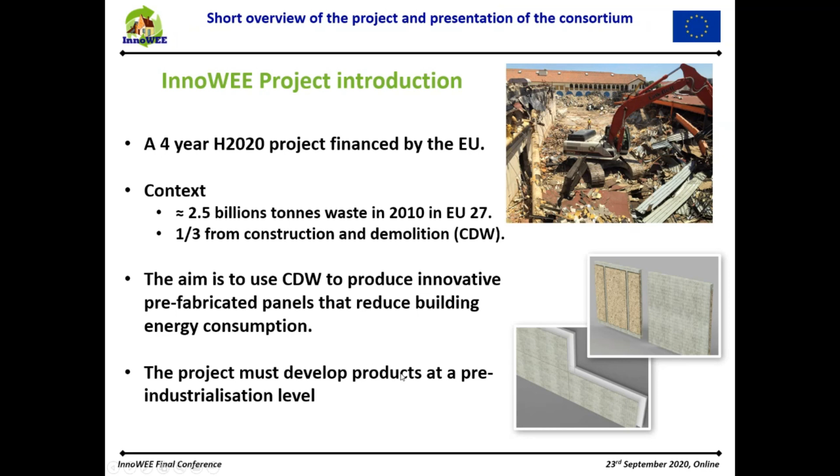We recover, disassemble, and select this waste to produce high quality raw materials to be used to produce the panels. Then we produce this panel, this construction product, to be used in the construction field. And after this production, we demonstrate the different kinds of panels in real field in different scenarios. Then we demonstrate that they are cost efficient, and we build the business model for future application in the industrialization field. Finally, as usual, we produce guidelines and training material, and we do a big dissemination, notwithstanding the problem with COVID that limited some of it, at least in presence.

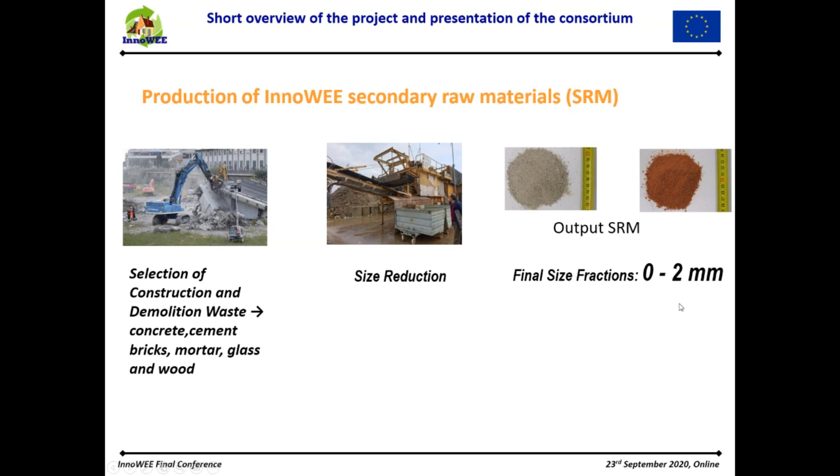The innovations that we produced were to treat the waste, the CDW, to yield suitable raw materials and use a new environmentally friendly binder, the geopolymers. Here is the novelty: we use a friendly and green product instead of concrete. You can see here very shortly, and you will see more detail after my presentation, the production of InnoWEE secondary raw material. We go from selection to size reduction to arrive at a very fine final dimension, from 0 to 2 millimeters, which will be included in the geopolymers, producing high density geopolymer panels with 50% of inorganic CDW and wood geopolymer panels with 50% of wood CDW.

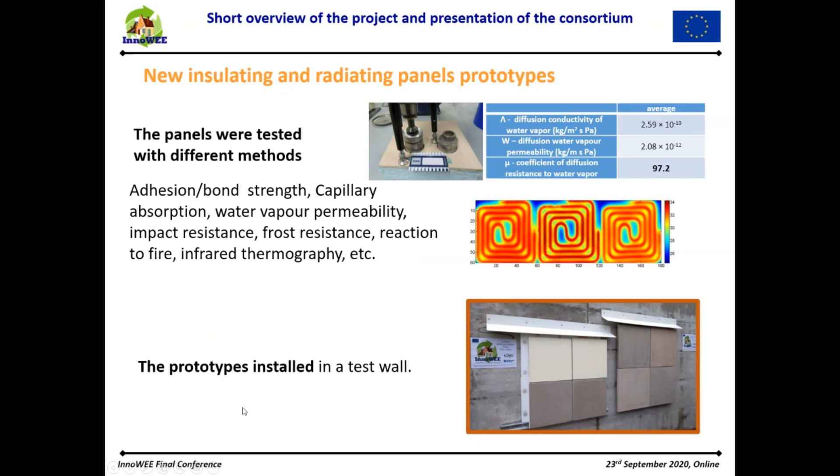This is a short figure that shows the 4 kinds of panels that we produce, which will be detailed in the next presentations explaining how we arrived at these panels. The panels we produced were tested with different methods in the lab. We installed the prototype at a test wall before going toward the field, and we scaled up the panel to produce enough quantity to be installed in the real case study, and finally, of course, distributed to the demo sites where they were installed.

What are the demo sites? We had 4 real demo sites. We had one in Padua, in Italy. There was a pilot house where we did all the tests before going to the field to install in the real houses or buildings, different kinds of buildings.

And after this first test, we go toward the real demo site. There is one in Greece, in Athens, in Voula in particular, a nice village near Athens, in a historical classified building. So we also involved historical buildings to see how we could use these panels also in more complicated situations like historical buildings.

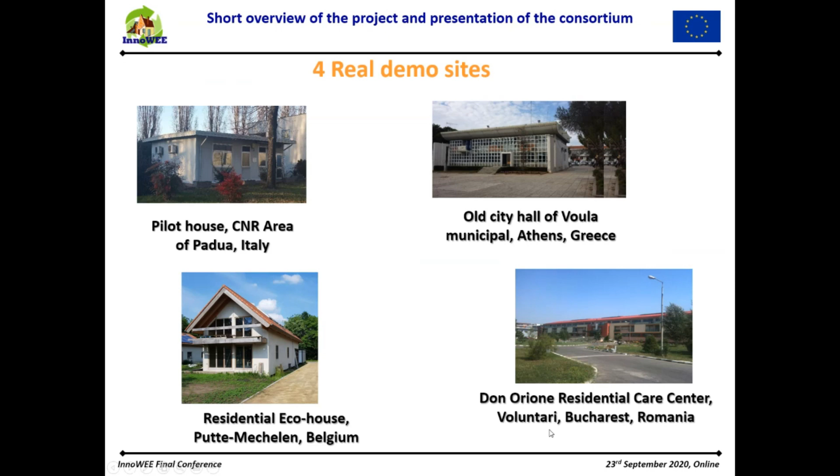We have another one in Mechelen in Belgium, and this is an eco house, a residential house built with eco materials. And after we have Don Orione Care Center in Bucharest, in Romania. In these real demo sites we installed, as you can see shortly in this image, the different kinds of panel.

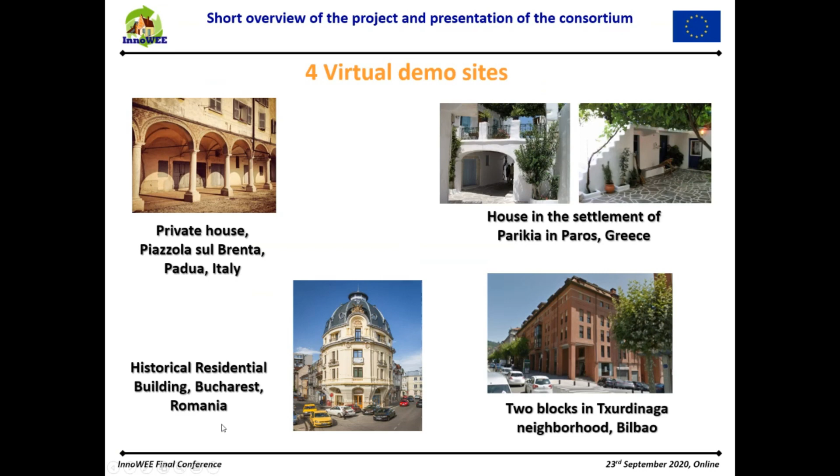And finally, we had also work that was interesting in terms of virtual demo sites. This means that they are real demo sites, but the application of the panel was not real; it was virtually put on the walls to see and model the effect of the use of the panel in this demo site. As you can see, one is in Italy, one in Greece, one in Romania, and also in Bilbao. So we did, as I said, this simulation.

This is just a little image, but there is a colleague that will present all the results and the modeling of energy performance of this product to find the best solution in terms of efficiency and comfort. As I said, these are the other aims of the project.

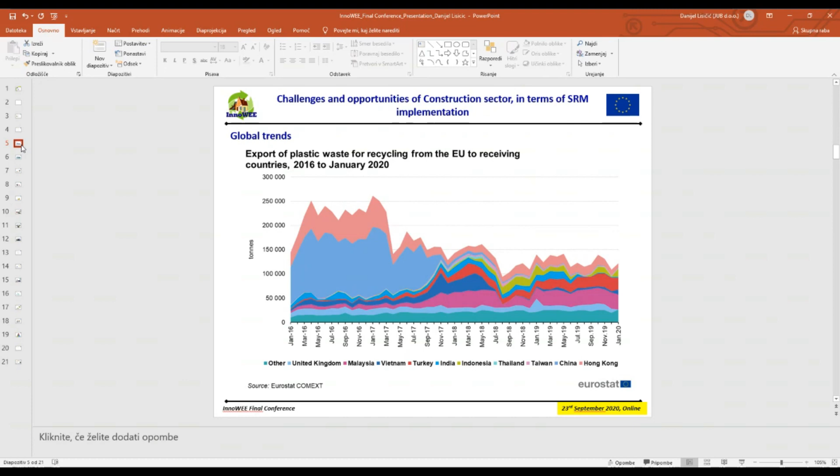The same goes for waste paper for recycling. On the other hand, the question arises why transport plastics such long distances and not find ways to effectively use this material ourselves.

So let's see some challenges for SRM implementation. One of the challenges is to have a consistent quality of SRM. The reasons for quality variations can be different, like different source through time, source mixing, or impurities.

When we developed insulated concrete forms from EPS for nearly zero energy housing, the plastic brackets between EPS walls are made from polypropylene. When we tested tensile strength of brackets from virgin raw material, the results range was much smaller compared to the recycled one. Although the average tensile strength was even a bit higher, we chose to produce brackets from virgin polypropylene. During pouring of concrete on the construction site, we cannot afford that some brackets break, because we could endanger a worker's life. So it's also the intended use that matters, and such a broad result range was not acceptable for us.

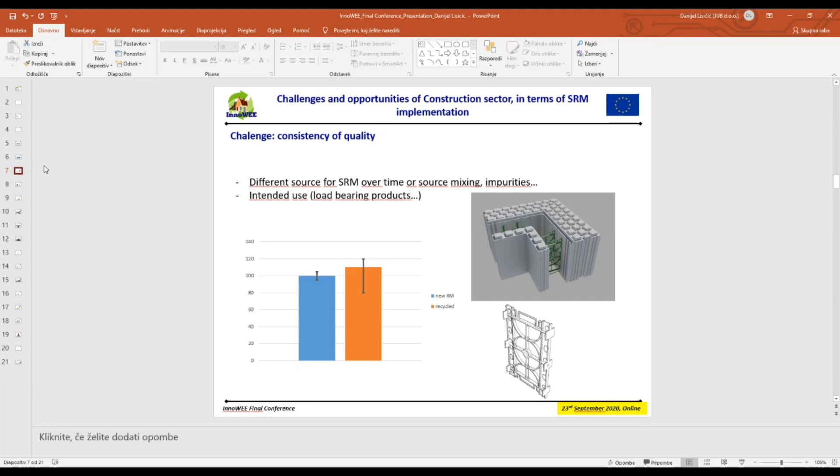The decision on use of recycled material for buckets was easier. The main problem could be in the shaker, the tinting machine, but there is no danger for workers' lives if failure occurs, only the machine life.

But we had quite a challenge introducing plastic handles instead of metal ones, because the handle must be more elastic while the bucket must not be, but they are made in same extrusion process.

When you come to price competition, we have two situations. The price of the SRM could be higher than virgin raw material due to demanding technological processes for collecting, sorting, cleaning, and transporting. Another thing is that the final product could be expensive if we want to have the same end properties.

This was the case with brackets in insulated concrete forms. Another thing we could do is prescribe a smaller concrete pouring height, but this would also be a disadvantage.

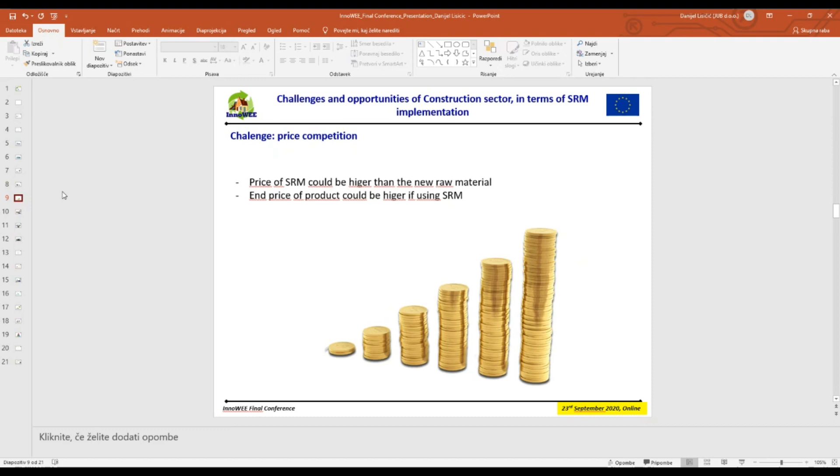It is always desired that separation can be done on site, so material for recycling can be transported directly to processing without an intermediate stop at collectors, which demands extra labor work and additional transport.

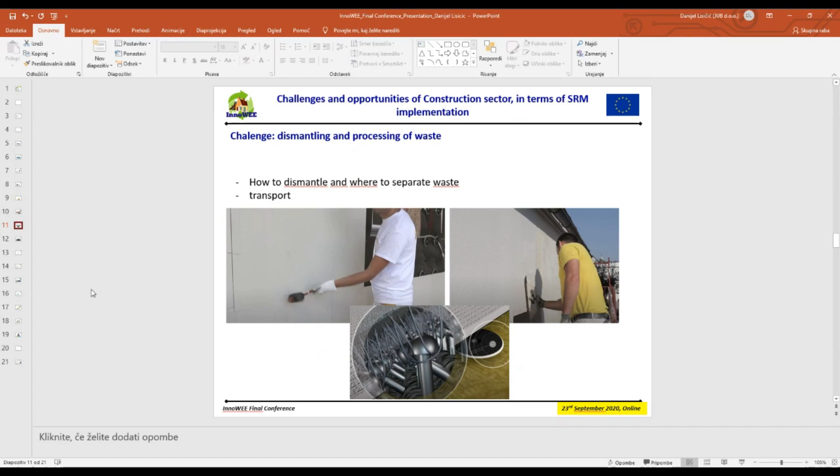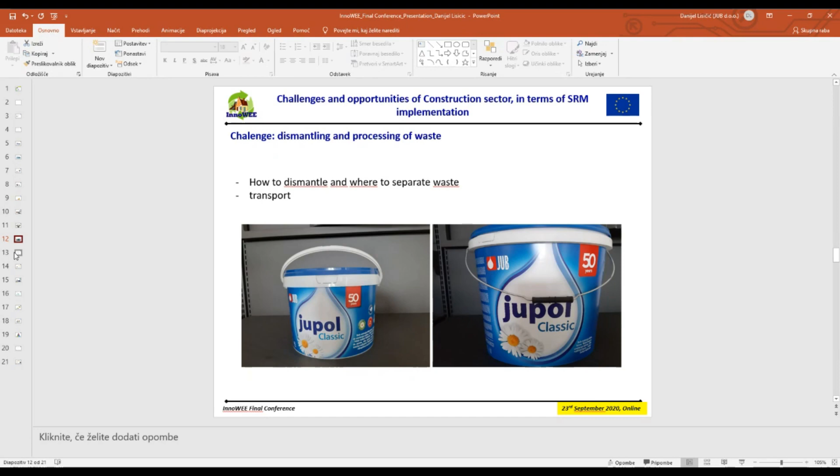Here I present one interesting way, from Sony company, to treat EPS package waste. It is not something new, but I like the idea. They extract oil from the peels of oranges, which dissolves EPS.

The truck with the limonene oil liquid has a tank in the back, and it goes around collecting EPS waste from the stores, reducing transport costs of this lightweight, large-volume material. One vehicle can collect the same amount as 10 trucks. After collection, limonene and polystyrene are separated and can be used again.

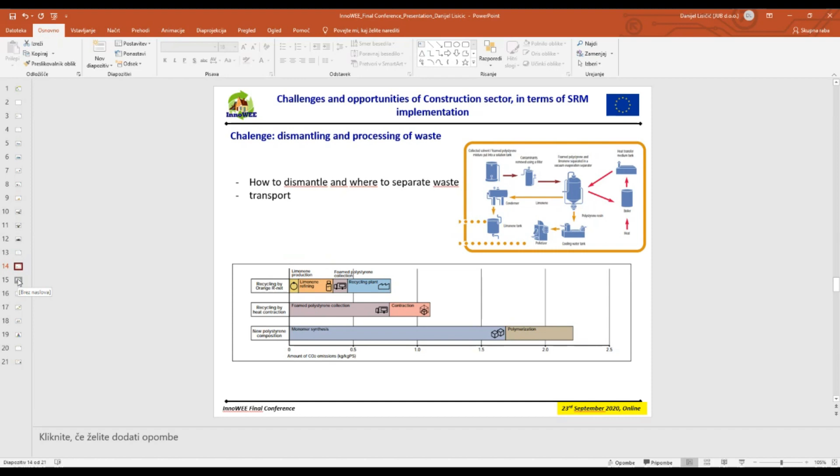Another thing is public perception and health. The perception about recycled products in public could also be negative. For instance, about two years ago, one of our salesmen from Italy asked me for a declaration that one of our products doesn't have any recycled raw material. At first, I thought I had misunderstood him, but in the end, we saw that investors specifically wanted a product without SRM.

So the choices of millions of consumers are important and can support or obstruct circular economy. Right and credible information must be provided and communicated. A lot of so-called green science and green statements can be found today on the market, and consumers often don't know how to compare products or which information to trust.

Another big challenge, I think, is the impact of REACH regulation on the SRM market. Constantly, new chemicals cause concerns about health and environment. For instance, EPS for facades contained, until 2015, a flame retardant which is now on the list of dangerous substances. In the future, there will be problems with such waste.

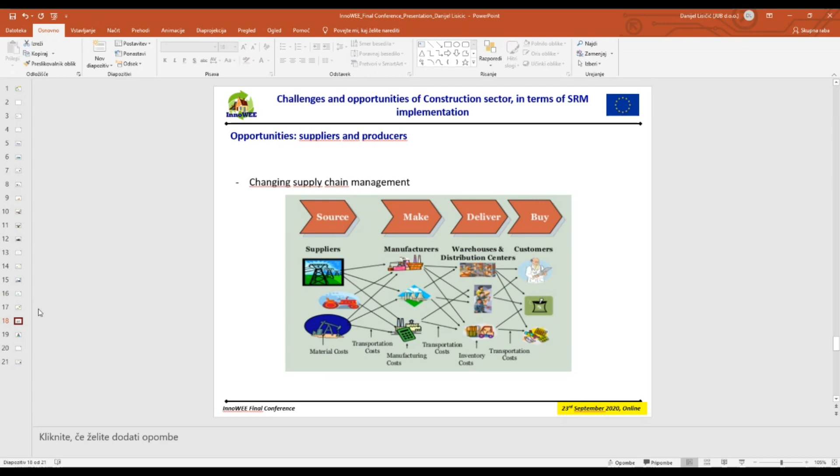But if we want to somehow recycle polystyrene, we could go on the left side of the pyramid, but in that case only for EPS without dangerous flame retardant. We could establish partnership with waste collectors. They must know how to separate EPS from the dangerous one, invest in equipment for compacting EPS, and if we want to use polystyrene forward, we should invest in a plant for extrusion of polystyrene.

So, a much bigger effort than in the previous case. But recycling EPS with dangerous flame retardant is something that is beyond companies like JUB.

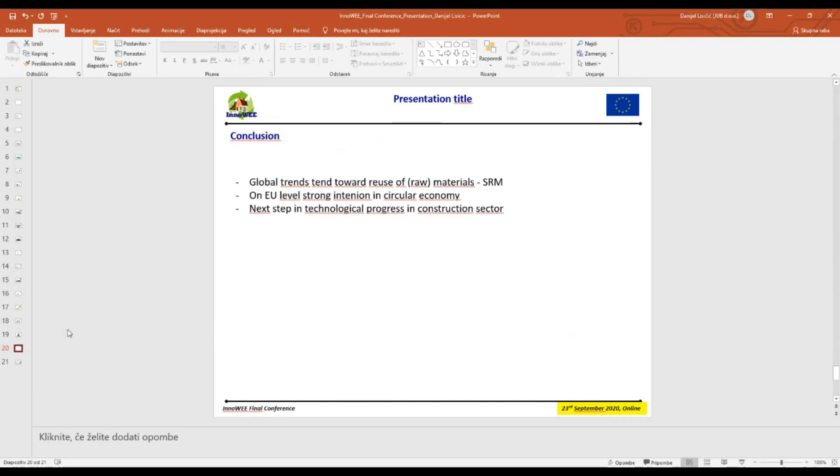So we come to the end. I wish to thank you again for the opportunity to be part of the final conference of such an interesting project. And I really look forward to hearing the next presentations about final results of the project, and really hope that this is just the beginning of a successful story.

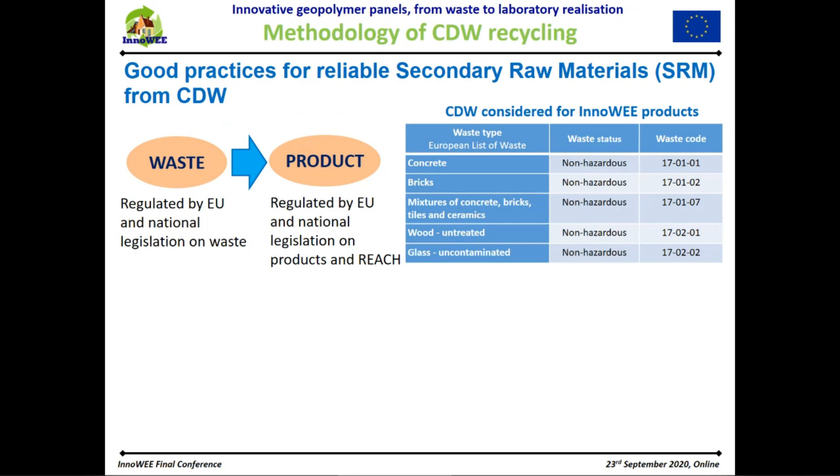To improve the collection of materials for reuse and recycling, selective demolition and appropriate on-site operation are required. For this reason, the waste management protocol was made in 2016 by the European Union and defined these 4 points.

First, pre-demolition audits to identify the construction demolition waste generated and what kind of materials. Then produce a waste management plan, defining the different steps of demolition and how and by whom it will be performed.

Then perform a selective demolition: separation of all materials, hazardous waste separated from the other, construction separation and fixation of the materials. And at the end, the fourth step is processing and treatment.

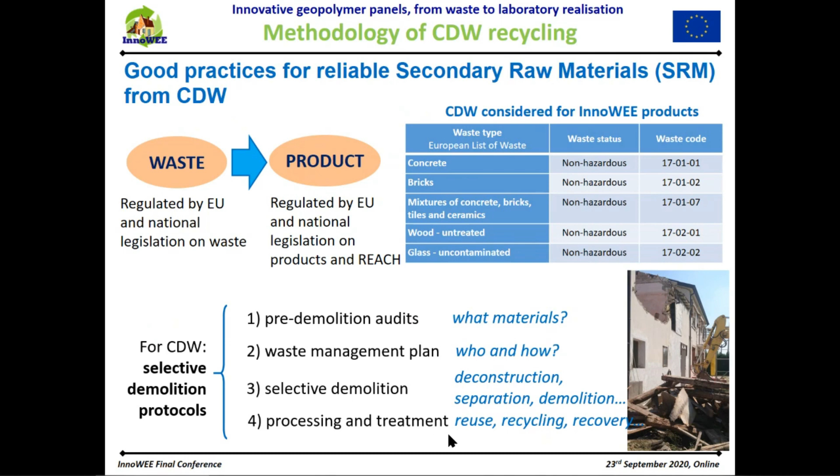After this process, the material can be prepared for reuse, recycled, or disposed of if there are no other choices.

In the InnoWEE project, after the demolition process, the last step of processing and treatment of construction demolition waste was performed by our project partner ECO G. from Italy, that has transformed the CDW into secondary raw material. For the production of this secondary raw material, they have used the 30-60 mm fraction of their processing plant. This was the processing plant.

Further refinement by an additional screen was necessary to meet the desired dimensional range for the project, 0 to 2 millimeters. The transformation into secondary raw material, permitted by local authorities, has been used in construction works to comply with environmental prescriptions such as dust reduction or sound absorbent barriers and so on.

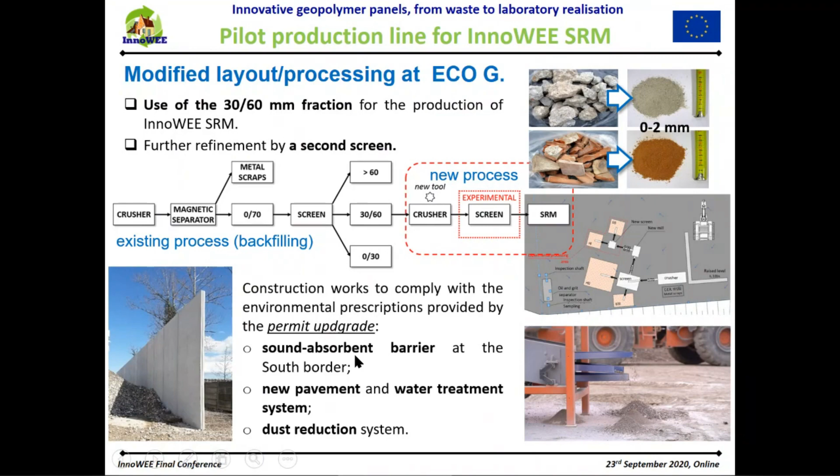To comply with end of waste criteria specific to local authorities, the obtained secondary raw material is analyzed in laboratory to verify that it meets the prescribed physical and chemical requirements, following specific procedures described in the standards. For example, macroscopic composition of organic waste, mineralogical, chemical, qualitative phase analysis, particle size distribution, density, water absorption...

Leaching test. The leaching test was quite important because it's important to identify the heavy metals present in the waste, then geopolymeric reactivity and other analyses.

One innovation introduced in the InnoWEE project is the use of geopolymers as a new ecological binder. Geopolymers are inorganic materials produced in a process in which aluminosilicates are activated with an alkaline solution. The name geopolymer means that they mimic natural compounds such as zeolites and exhibit the main properties of rocks: hardness, chemical stability, and geological longevity. The name contains the word polymer because they are obtained by a polymerization process called polycondensation.

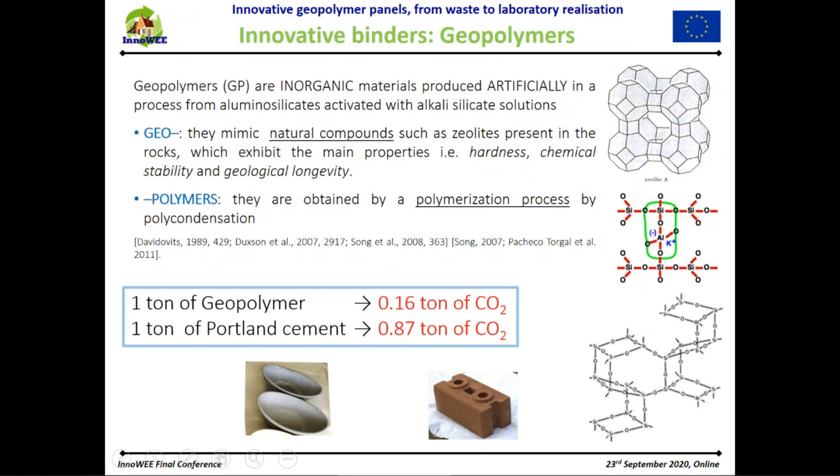The reagents to produce geopolymers are aluminosilicate and an alkaline solution of potassium or sodium. Aluminosilicate used also in our project can be clays like kaolin, calcined as metakaolin, or slag wastes that come from the iron production process, or fly ashes, other wastes from energy production plants. Other aluminosilicates are pozzolans, very common.

Geopolymers do not require the presence of Portland cement to harden, as we have seen, and show the best properties of ceramics and cement-based materials, as they have good mechanical performance, excellent adherence to aggregate, fire resistance, good resistance to acids and chemicals, and a low hardening temperature.

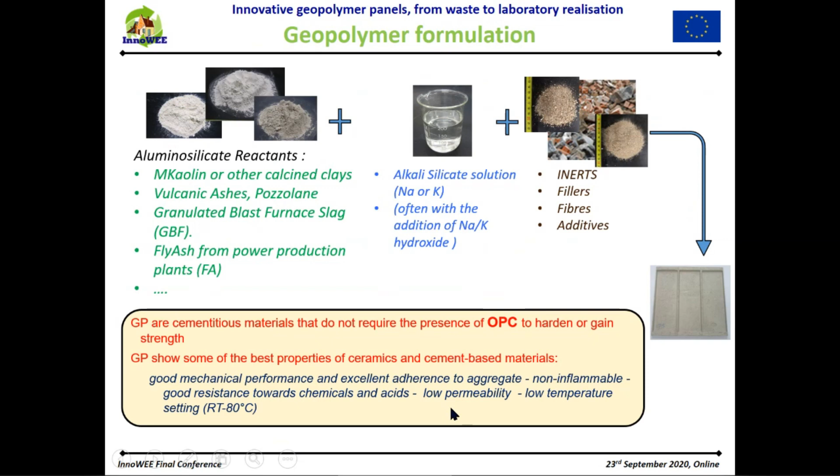Using the geopolymer binder produced by mixing metakaolin, slag, fly ash, silicate, and so on, we obtained two kinds of products by inserting inorganic construction waste or construction demolition waste, or wood waste. That is another type, a construction waste.

The first product, called high density geopolymer, contains 50% of inorganic aggregates, and the second contains 40–50% of wood from construction waste.

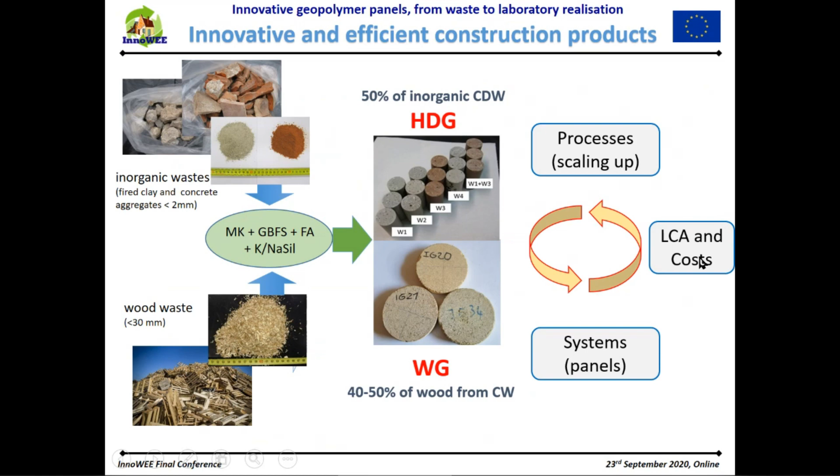The research carried out to optimize this binder was very important, the core of this project. It was also very difficult because you had to take into account several aspects. First was the creation of panels, and therefore the possibility of creating large panels with good mechanical properties and possibly no defects. The second aspect is the production process of a panel, which requires certain characteristics of a mixture such as fluidity, workability, long setting time, and so on. Another important aspect was the cost of the materials and the final panel, and the life cycle assessment of the process.

The innovative, efficient building panels produced from this geopolymer mixture must have important technical characteristics. We had to comply first with energy efficiency, and therefore must have comparable performance with the products on the market.

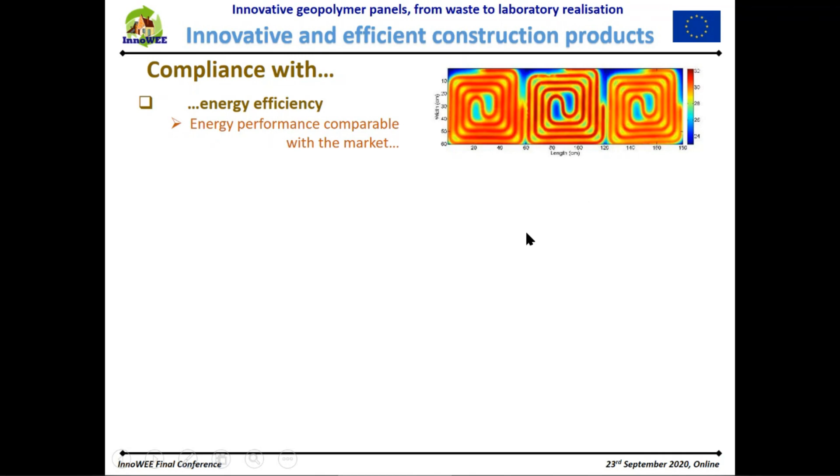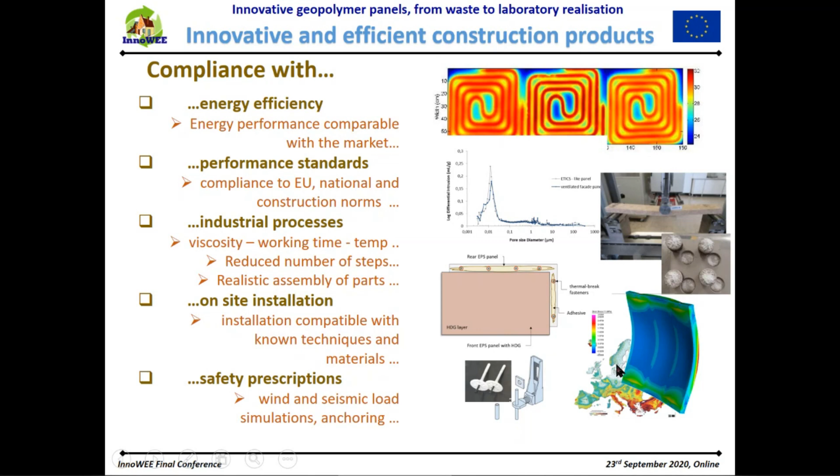They also had to comply with national and European construction standards and regulation, and with industrial processes, meaning low viscosity and so on. They must also comply with the design of these panels, because they have to be compatible with known installation techniques and with the materials used by workers in the sector. Lastly, they had to comply with safety requirements, so the panels were designed to withstand wind loads and seismic activities, which required accurate simulation and an effective anchoring system.

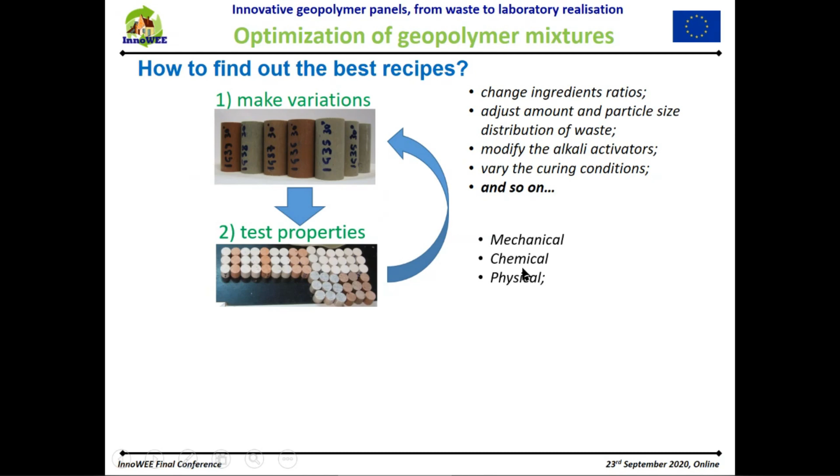How to find the best recipe to produce the right panel? It starts from a basic recipe, and then with a try and error process, changes are made on the components and granulometry of all these parameters. After, the properties of the individual recipes are tested with mechanical, chemical, and physical characterization. If there are problems, you go back to change the initial recipe.

If good results are obtained, we move on to the production of large prototypes, where the defects that the initial mixture can produce are highlighted. In the case of important factors, you come back to change something, and the process goes on until the final product is satisfactory.

About characterization, the first characterizations used to qualify are certainly mechanical tests performed on all samples produced: compression test, splitting test that evaluates the tensile stress and bending stress.

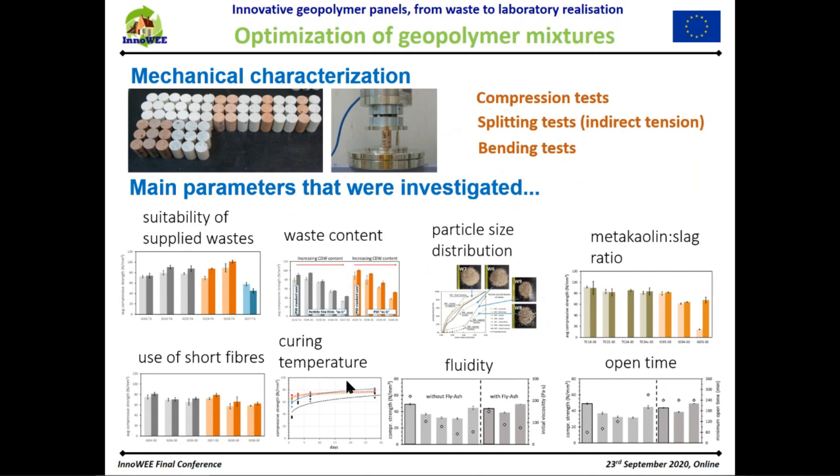Then other parameters were investigated. These are some examples: the suitability of a waste, the content of waste used, bricks or cement, the particle size distribution. Then talking about the reaction rate, about the reagents, the use or not of short fibers and what kind. Then the process: curing temperature, fluidity, open time, and so on.

The final recipe that has been obtained, optimizing the parameters we described, is a compound that has a compression strength of about 40 megapascal at 28 days, and a viscosity of about 120 pascal seconds, with open time after 100 minutes having a viscosity of about 600 pascal seconds.

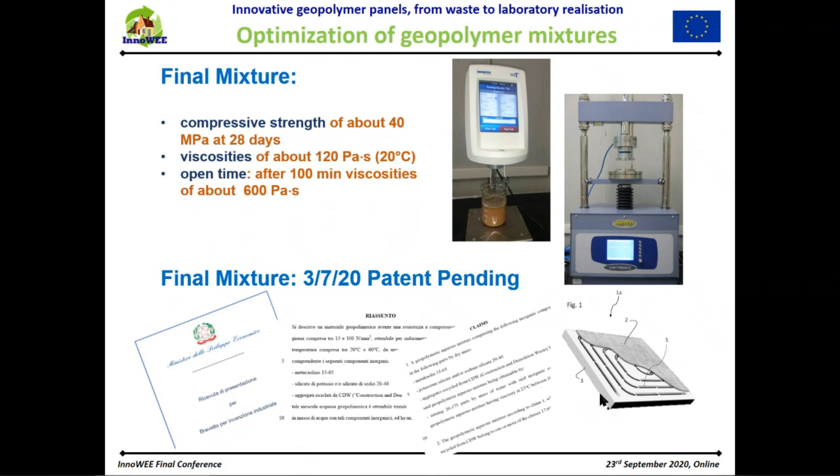Starting from this recipe, a patent application was filed. The aim was to protect this invention, and together with the recipe, we also protected one of the best performing products obtained, the radiant ceiling panel, which has shown particular efficiency properties, and we'll talk about this in the next slide.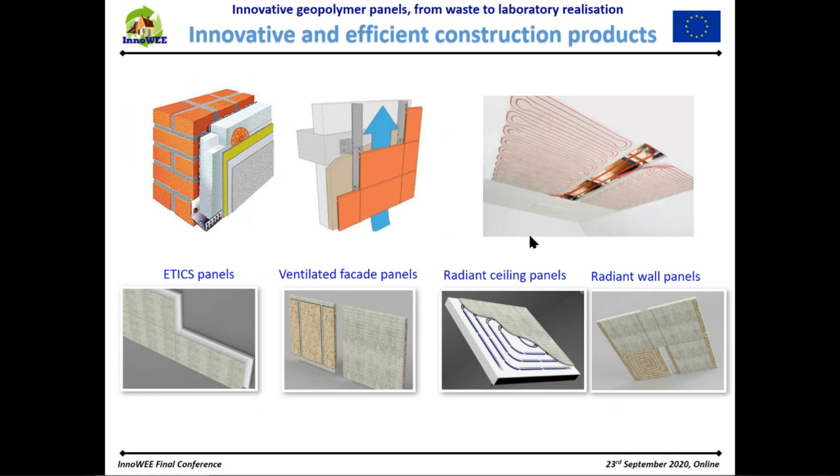Talking about how these panels are constructed: the ETICS measures about 50 by 50 centimeters in prototype, but in production it was 40 by 90 centimeters, with an external layer of about 8 millimeters of high density geopolymer and internal EPS insulation, with a weight of about 18 kilograms per square meter. It is mounted on special anchors, and the design features a shifted EPS edge that allows the overlapping of panels to reduce the thermal bridge.

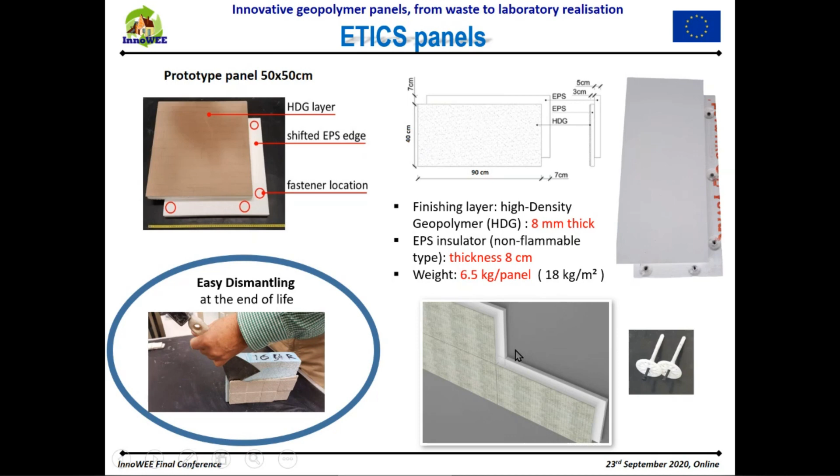It was also designed for easy dismantling at the end of the life of the product.

Talking about the ventilated facade, the dimension is 60 by 60 centimeters and the weight is 25 kilograms per square meter. It is built, as before, with an 8 millimeter high density geopolymer plate, reinforced with geopolymer ribs of 3 centimeters and metal fibers. On the back, we have used a particular kind of geopolymer made with wood to improve impact resistance. It can be mounted on a metal structure with a special anchoring system.

The last panel is a hydronic radiant ceiling panel with a side of 60 centimeters, weight 21 kilograms per square meter, containing an internal hydronic circuit. The external surface is always the same high density geopolymer, with 50 millimeter EPS insulation in the back. It has very good thermal performance and is mounted in false ceilings, with connections on the back side.

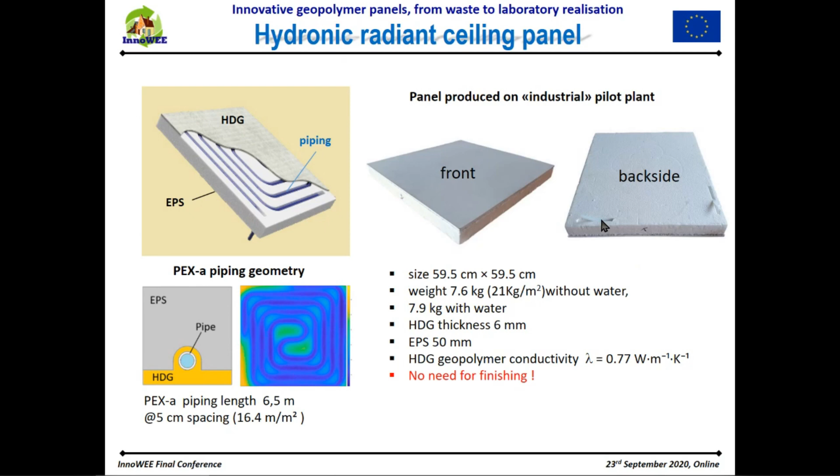How to produce these panels - how is the process to produce them. The manufacturing process is similar for all 3 types of panels. For example, for ETICS 50 by 50, the panel was produced with a geopolymer casting in a casting box.

You can also put a texture that gives an aesthetic finish to the panel. Then the box is vibrated because the geopolymer has thixotropic properties, which helps spread the material. Then we put a fiberglass net, then the EPS layer, again pressure and vibration, then everything is closed with the lid, and after vibration the panel is placed in a sealed bag.

In an oven for curing for 12 hours. Then after 5 days of curing, the panel is ready to be worked and finished with painting, for example.

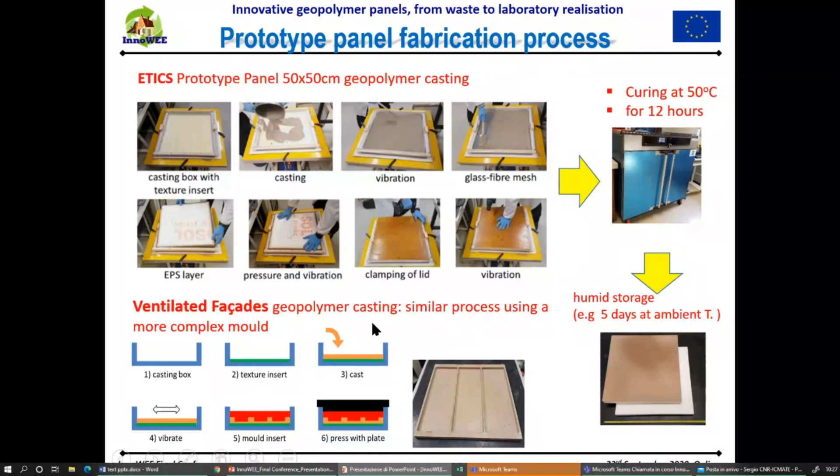In case of ventilated facade geopolymer casting, there is a similar process, but using a more complex mold.

As we said before, the panels have been designed to be safe. A series of pull-off tests were carried out to evaluate the bond strength between the geopolymer plate and EPS in the back. Other studies, for example, were on impact resistance, to be able to use these panels safely in open spaces.

The design of these panels and the anchoring system was assisted by 3D finite elements modeling to ensure compliance with Eurocode and anti-seismic wind load guidelines.

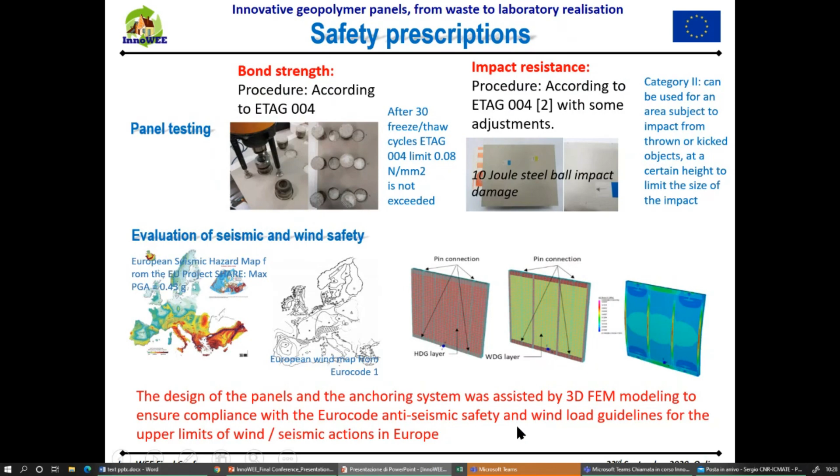Particular attention was given also to the finishing of the surfaces and the surface texture, thanks to geopolymers' ability to copy microscopic details. It is easy to give the surface a particular design. The natural color of the geopolymer in our case is determined by the type of waste inserted.

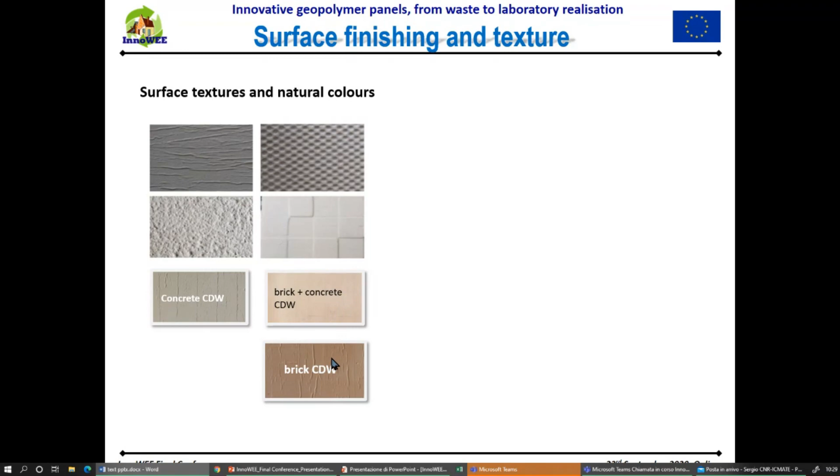Gray if concrete, red if brick are predominant. In our case, thanks to the other partner AMS, multifunctional color paints have been used that contain additives from nanotechnology, used to enhance properties such as reduced water absorption, self cleaning, antibacterial, anti-mold, and thermal reflectivity.

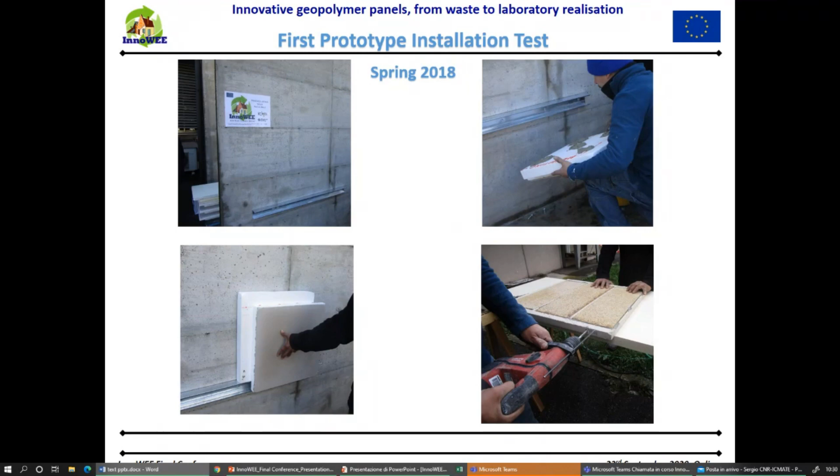To conclude, at the beginning we showed how the project was concluded at the prototype level. We produced in 2018 the ETICS ventilated facade panels that were installed in Padua near the CNR facilities. After this, the process of upscaling started.

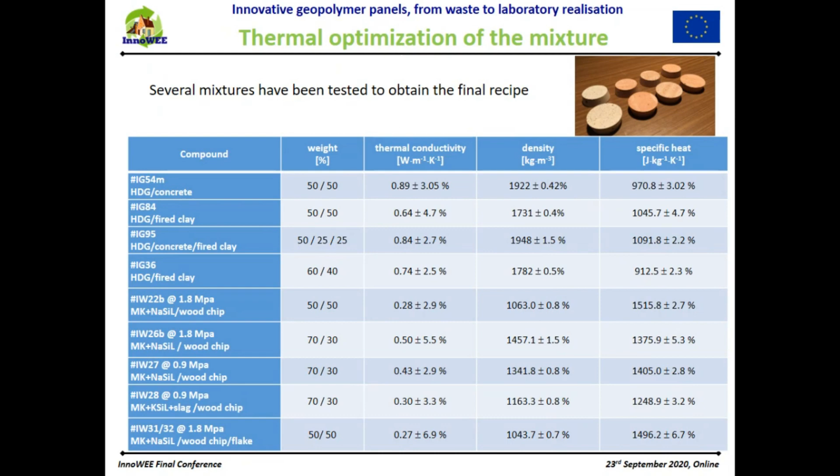We have measured a wide range of mixtures, and on the image on the top right you can see some examples. We found that the high density geopolymer can reach very high thermal conductivities, in a range of almost 0.9 watts per meter Kelvin, that is 3 or 4 times higher than the standard value of plasterboard commonly used for radiant heating. Also, wood geopolymer could reach quite good thermal conductivity values. The thermal capacity, the product of specific heat and density, can be very high for the high density geopolymer, which could be beneficial for the thermal inertia of ETICS panels.

We tested also the thermal behavior of ETICS panels in two ways: steady state and transient state. In steady state, we measured the thermal conductivity with the standard method, EN ISO 8302, using the hot plate apparatus. We tested both the laboratory production from ICMATE and the upscale production from AMS.

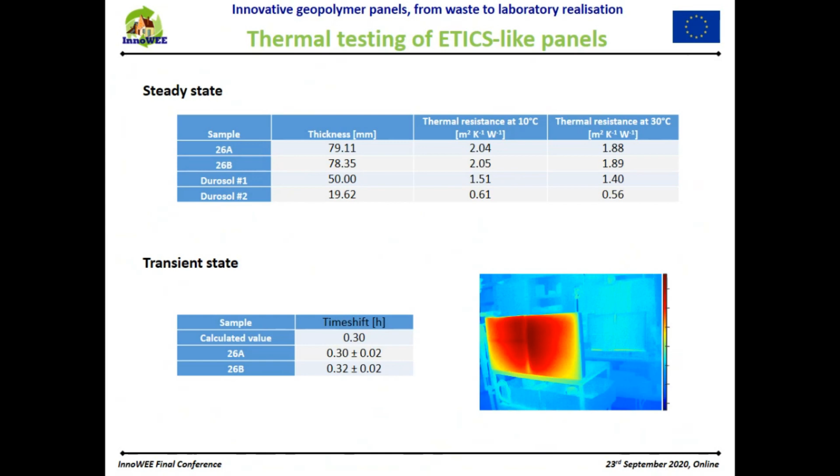Now I move to the radiant panels. Here we made some optimization of the design of the radiant panels before the production. We made a lot of numerical simulations in 2D to investigate different geometries of the system, to quantify the impact of the thickness of the finishing layer, and of the thermal conductivity of the geopolymer, and a lot of other parameters. And this 2D simulation contributed to the final design of the panel.

Also here, we have performed both steady state and transient measurement. The steady state thermal output, as described by the standard, is the main characteristic, but the transient measurement is also interesting, because we are able to determine the time constant to understand how fast the panels are to provide the thermal output.

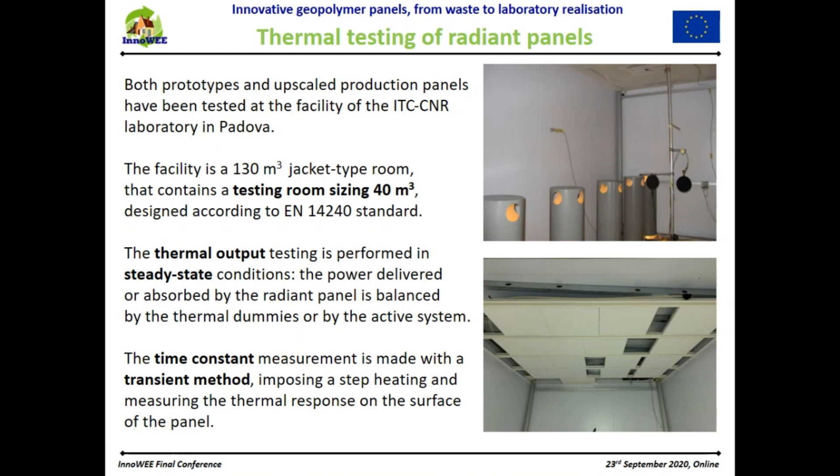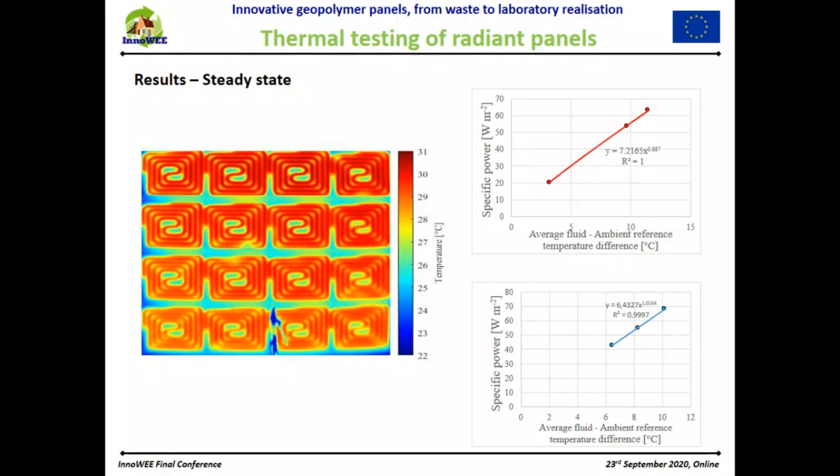Here we have some results for the steady state, and the panels were tested both in heating and cooling mode. These are the red and blue curves at different temperatures of the water inlet. And the thermal image on the left shows the surface temperature of the panel during a test. These panels are very homogeneous, and as expected from the numerical simulation, the thermal output is higher than a traditional commercial solution with plasterboard finishing.

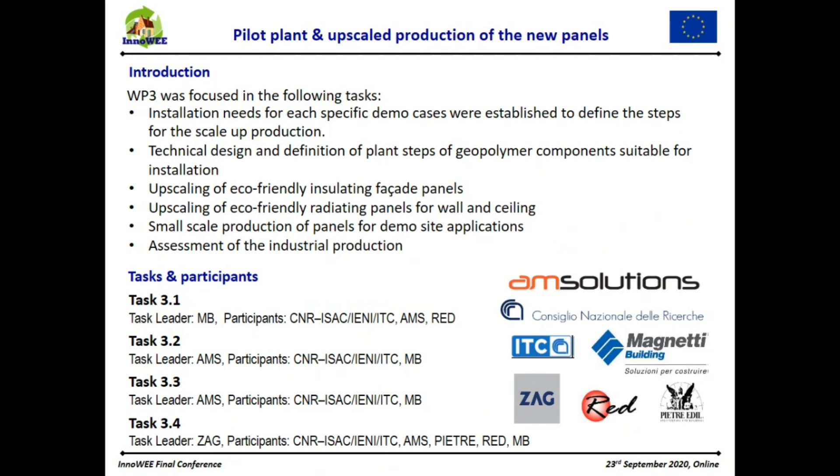So, trying to upscale the high-density geopolymeric panels was not an easy task. It was clear from the beginning that modern methodologies and modern technologies had to be adapted in order to reach the desired result.

When we say define, we mean identification of all products and production requirements, which will set up the design requirements and the framework. And the next step is measure. Once the first step is completed, then in the pilot plant a range of samples will be produced and tested for their properties. And this is a trial and error period that is necessary to determine the best possible setup of a production line.

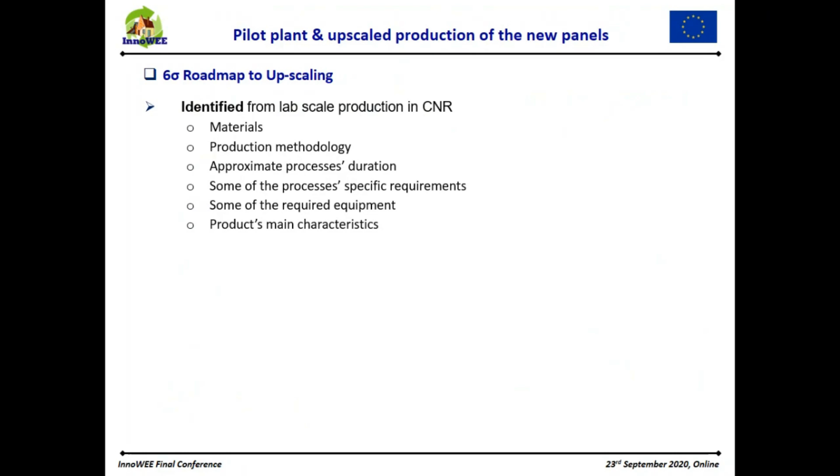Well, at the beginning, we identified from lab scale production that took place in CNR the materials needed for the production of the high density geopolymer panels paste, a lab scale production methodology, the approximate processes duration in lab scale, some of the process specific requirements, the required equipment, etc.

Though it was clear also at the beginning that there were still a lot of issues that needed to be clarified, such as the auxiliary processes and utilities, critical tasks, production tasks, influencers, which means which tasks were influencing other production tasks and how they were influencing them, relationships among processes, the personnel involvement, etc.

The 6 stages are the preliminary design, where all issues related to the design are identified. Then is the detailed design, modifications in the pilot plant, where all modifications of the detailed design are applied in the pilot plant, the trial and error period, corrective actions, and finally the actual production of the high density geopolymeric panels.

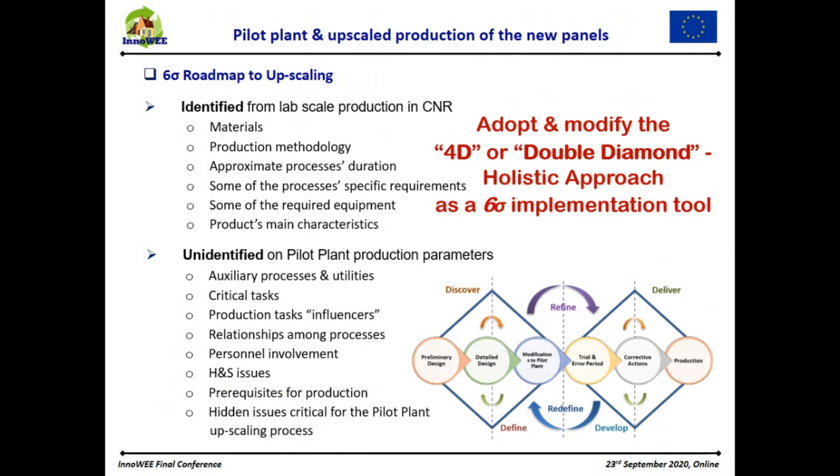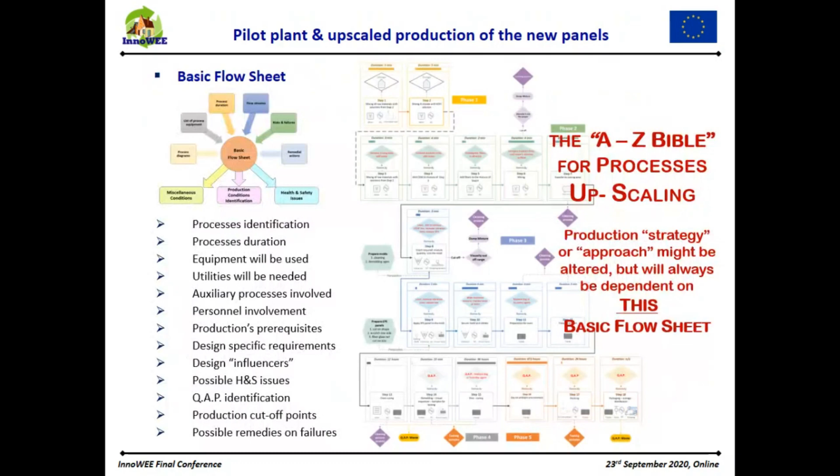From the basic flow sheet, we were able to identify the critical paths of the overall process and develop a PERT diagram, set up a working stations diagram where each employee knew exactly what needs to be done and how, and analyze the production processes relationships. And the outcome was, as you can see in the bottom right, to establish production line conditions, adopt pilot plant conditions and know the limitations, and also identify failures and risks.

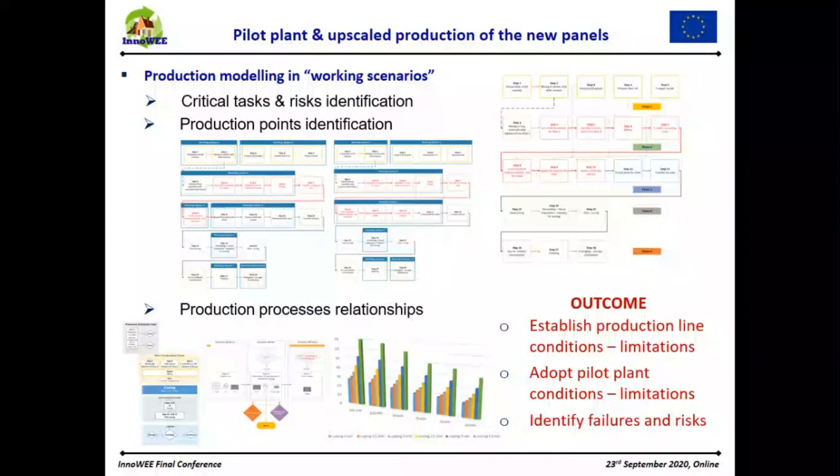And this is the pilot plant for the production of the new panels. Regarding the concept and the principles, as you can see, the modular operation was decided to be adopted. The pilot plant capacity was up to 700 kilograms per batch and can be easily updated to 2,800 kilograms per shift, can operate on a continuous basis if this is needed, and 80 to 85% of the processes were automatic or semi-automatic.

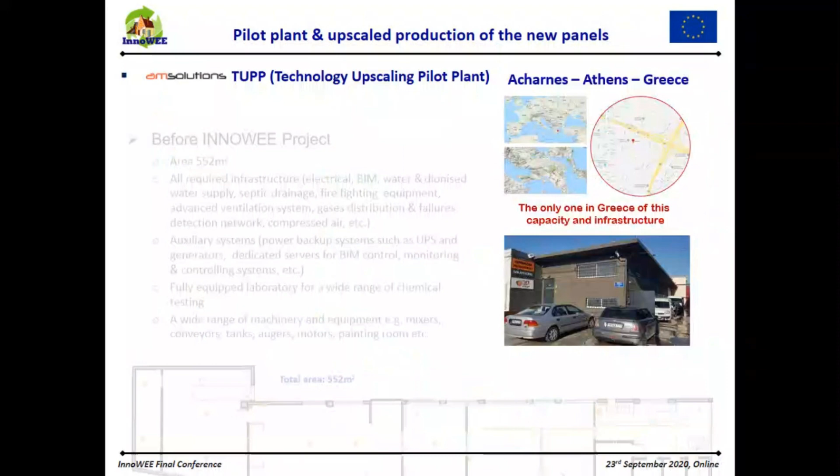And here is the technology upscaling pilot plant that was used for the production of the InnoWEE panels. AMS's pilot plant is located in Acharnes, in AMS facilities, and the pilot plant existed before InnoWEE and was equipped with all required infrastructure like the electrical network, water and deionized water supply, etc. Auxiliary systems, power backup systems such as UPS and generators. A fully equipped laboratory for a wide range of testing existed, and a wide range of machinery and equipment such as mixers, conveyors, tanks, motors, the painting room, etc.

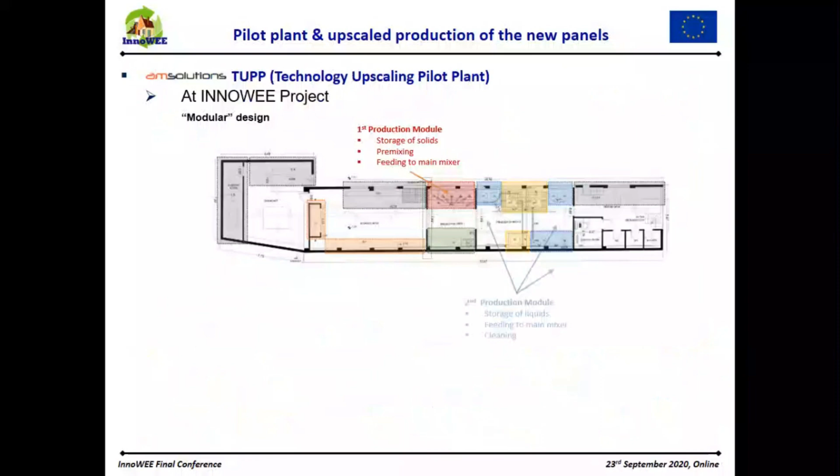And here is the technology upscaling pilot plant that comprises 6 modules. The first module is the storage of the solids and the premixing. The second module is the storage of liquids and the feeding to the main mixer. The third is the main mixing and the feeding to the filling station. The fourth is the casting. The fifth is the curing and the post-curing storage. And finally, the 6th module is where the preparation of EPS took place, where we paint the panels, we package them, and we store them.

Here you can see some of the modifications that had to take place in the already existing pilot plant in AM Solutions. Almost 200 modifications took place in order for the pilot plant to be able to be used for the production of the panels. You can see modifications in the premixing buffer, in the PLC programming, also in the mixer scale, premixing buffer scale, in the main mixer, etc.

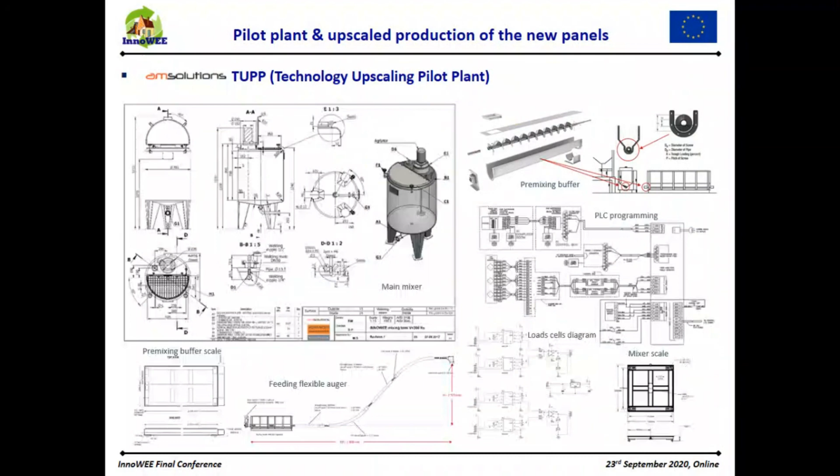And here are the production line simulations and modeling that had to take place in many points and many phases in the production line, like for instance, in the liquids feeding line, in the cold and hot water supply, in the mixing, in the nitrogen supply, etc.

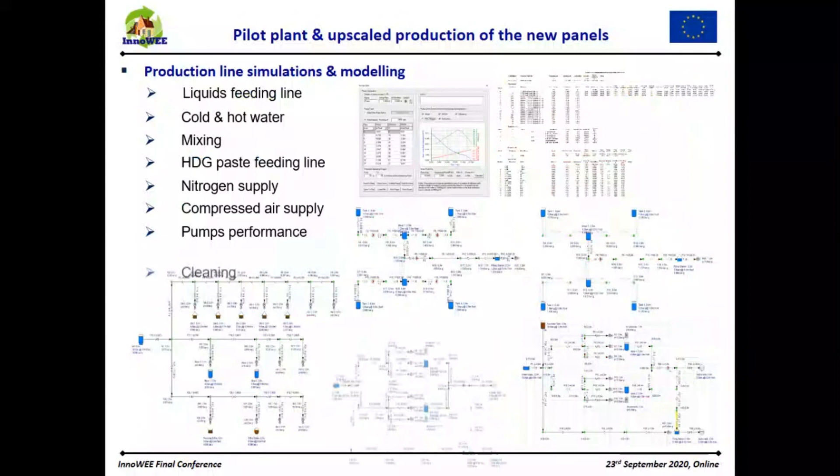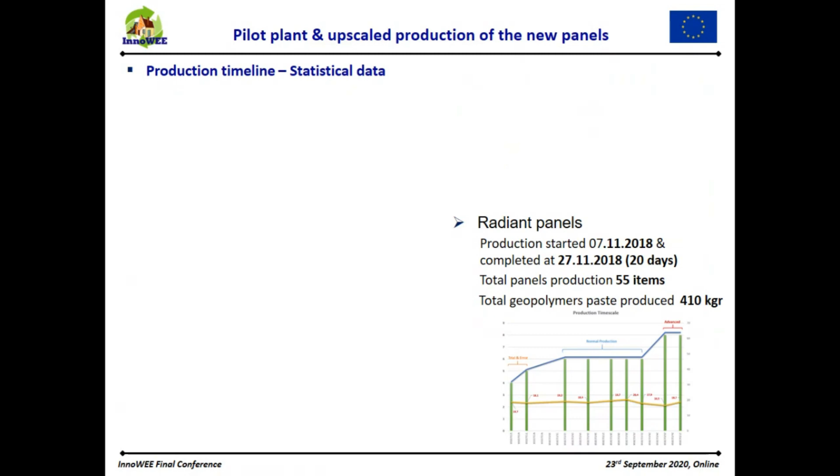And here is some statistical data. As you can see, for the radiant panels, the production lasted 20 days and 55 items were produced, and the geopolymeric paste was around 400 kilograms. For the ETICS, the production lasted 77 days, 264 items were produced and almost 2 tons of geopolymeric paste. And finally, for the ventilated facade panels, the production lasted 42 days, 85 items produced, almost 700 kilograms of paste.

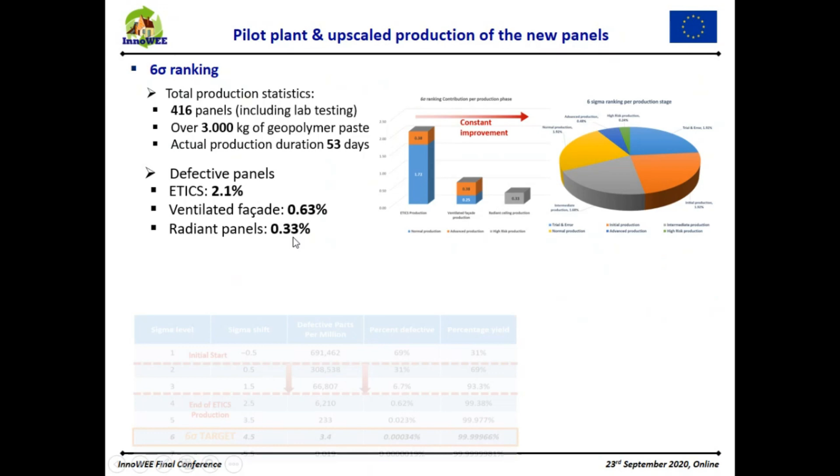And regarding the Six Sigma ranking and the defective panels, you can see here that we had 2.1% defective ETICS panels, 0.63% defective ventilated, and 0.33% defective radiant panels. And regarding the Six Sigma ranking, it was 3.06, so between the levels 3 and 4, and this was a very, very good achievement, as the usual ranking for a pilot plant production is much lower, between 2 and 3.

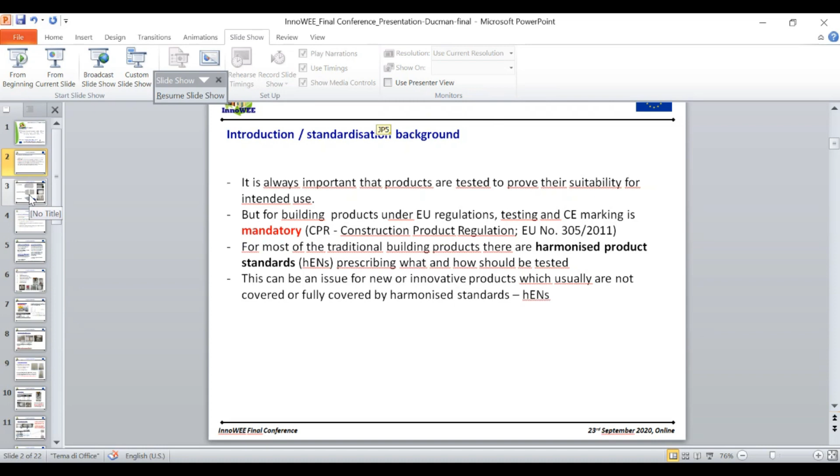To refresh, within this project InnoWEE, we have developed 3 types of building products. The first one is ETICS-like panels, the second one is ventilated facade panels, and the third one is radiant panels. And for all of these products, there is no standard available for this material. So how did we tackle this problem?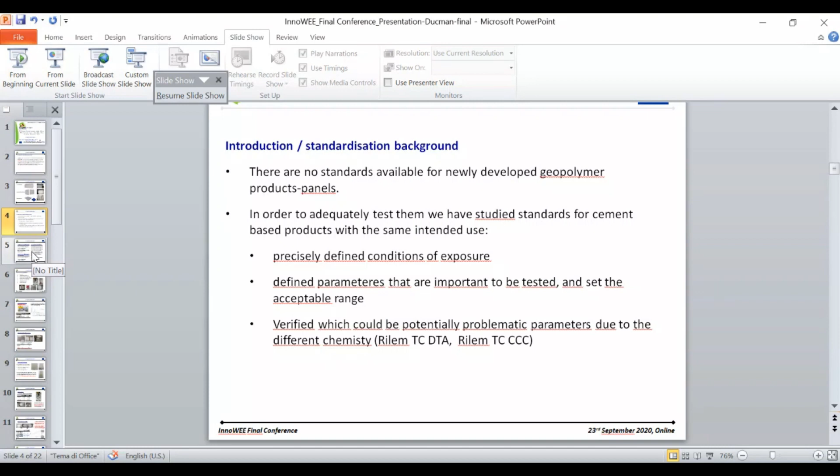In order to adequately test them, we have studied standards for cement-based products with the same intended use. And we have decided what we need to test and to which conditions they will be exposed, like, for example, freezing. Then we have checked which parameters are important for this intended use, like, for example, mechanical properties, water absorption. And finally, we have also checked state-of-the-art literature and knowledge regarding potentially problematic parameters, because this product differs in chemistry from cement-like products. It's a geopolymer product, as was explained before, so the chemistry is not the same as for cement-based ones.

So we have finally decided, based on the search of different standards and guidance, that we will use the test procedures described in 2 ETAGs. One is ETAG 004 for external thermal insulation composite systems with renderings, which is the closest to the ETICS-like panels. The second one is ETAG 034, which later on was superseded by another European Assessment Document. And for the durability aspect, we have selected to follow state-of-the-art procedures adopted within the different technical committees.

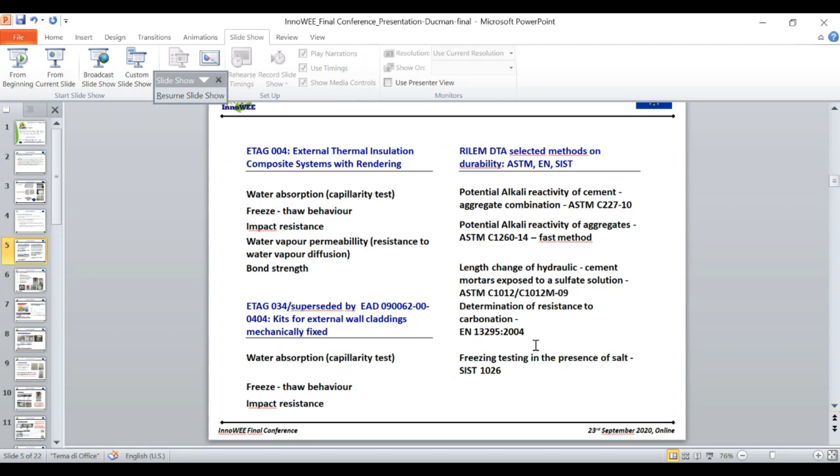With these durability testing methods, we cover alkali reactivity, sulfate resistance, carbonation resistance, but also freezing in the presence of salt. So at the end, this is the list of standard test methods which we performed first on the laboratory produced prototypes.

And later on also on the pilot samples from the pilot production. So I will present first results from the laboratory production and compare them later on with results from the pilot production.

The list of selected tests is determination of porosity, capillary water uptake, water vapor permeability, resistance to freezing thawing, also in the presence of de-icing salt, resistance to carbonation, alkali-silica reactivity, sulfate resistance, and also bond strength and impact resistance.

The first one is more like an identification test. It's not required in any of these standards, but it's a fast test method which gives information about density, porosity, and pore size distribution. As such, it can serve as an identification test to compare different samples with each other.

Here you can see the results for two types of panels, the ETICS-like panel and ventilated facade panels. What we can see is that the results are pretty similar. The composition is the same for both types of panels, and the production technology you have seen just before is similar, so we expected that these values would be pretty similar for both panels.

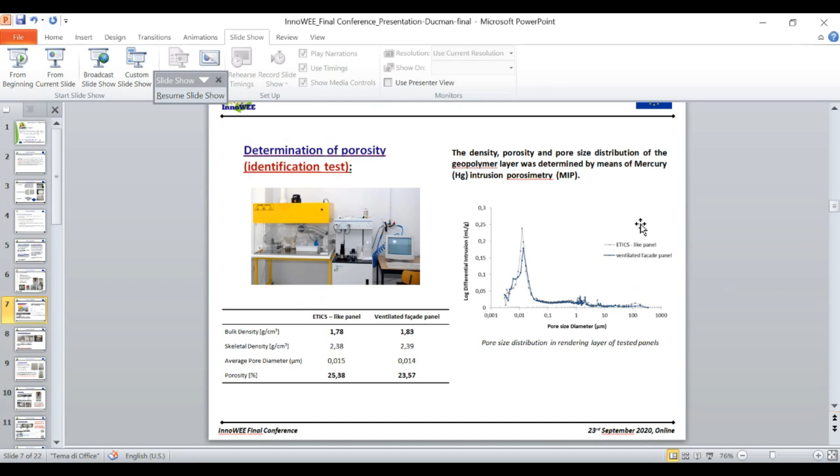The next parameter, which is important for facade use, is the water absorption test. This test also covers the same parameter as the previous one, porosity, but here it's determined through water absorption after 1 hour and after 24 hours.

It's written in ETAG 004 that if the water capillary absorption is above 1 kilo per square meter after 24 hours, then the material needs to be tested for resistance to freezing. In both our ETICS-like and ventilated facade cases, these values were over what is prescribed for cement-like materials, so we decided to perform the freezing test.

For the freeze test, we expose samples to 30 cycles from -20 degrees C to 23 degrees C. As you can see from the figures, we confirmed that after 30 cycles of freezing and thawing, there were no cracks or any damage on the surface of the samples. So no cracks were identified, and we can say the samples are freeze-thaw resistant.

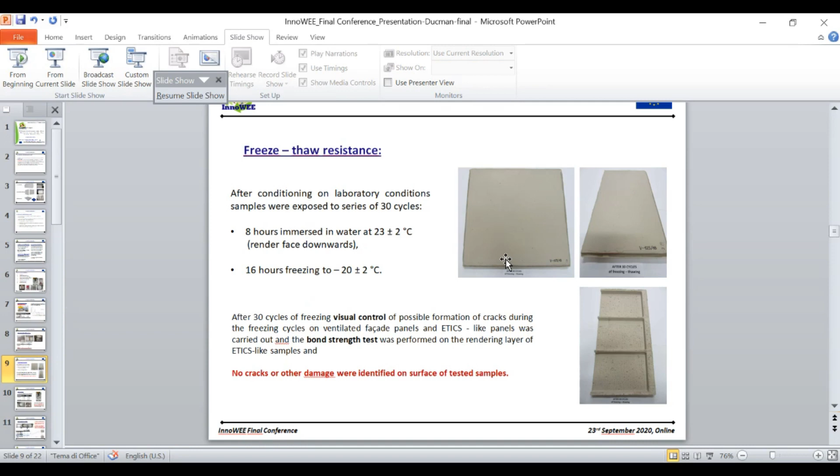What you can see here is the value before the freezing-thawing and after it. You can see that the adhesion is a bit lower, but still sufficient, because for cement-based material it should be at least 0.08 megapascal, and in our case it was 0.11. So it still fits for the intended use.

For the ETICS-like panels, it's also important that water vapor diffusivity lies in a certain range, because otherwise there's a risk of condensation between layers. In ETAG 004, the water vapor diffusion equivalent, the so-called sd value, should be below 2 meters.

In our case, for both panels, it's important only for the ETICS-like panels, because it's not so important for ventilated facade, but we tested them in parallel. It's 0.6, so again we can see that it fits for the intended use in regard to water vapor permeability.

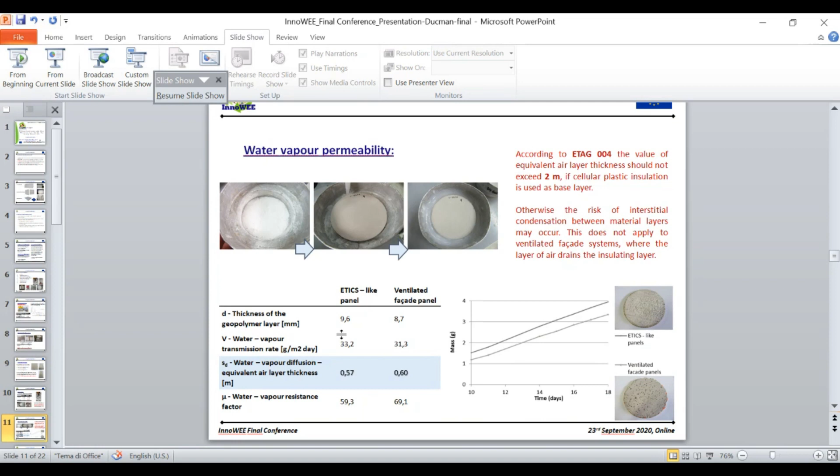The next parameter, important when such panels are used in the lower part of facades, is that they withstand impacts from different objects like stones, balls, bicycles, and so on. To improve impact resistance, a mesh is usually incorporated into the panels, which was also the case here. As you saw during the first and second lecture, they introduced mesh into the panels from the pilot production.

So we hit these samples with two balls, one smaller and one bigger, to get 3 and 10 joule impacts by steel balls. Damage was noticed only after the 10 joule impacts; nothing happened with the 3 joule impacts.

This means the material belongs to category 2, because certain damage was noticed after 10 joules. It means the panels can be used for a zone where there is a limited size of impact. If there is heavy traffic, then it's better if it's category 1.

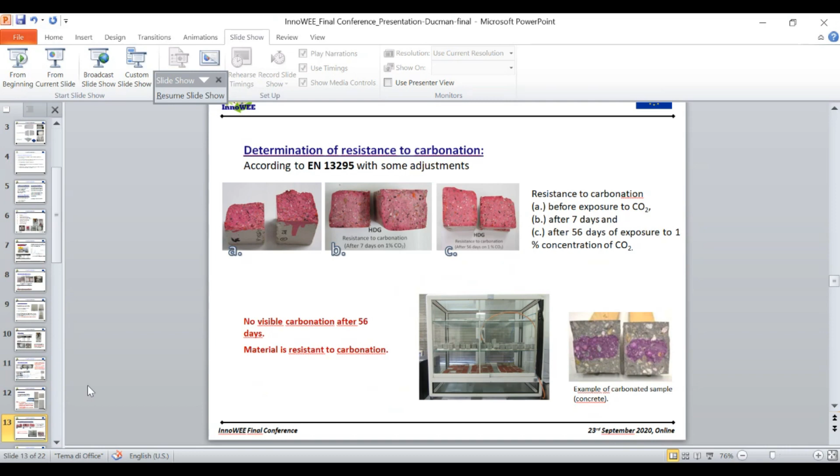The next parameters are related to chemical resistance of geopolymer products, and these are very important because we have to take into account that geopolymers in chemistry are not the same as cement. So we cannot compare them directly or say that they fit for purpose before we test all these parameters.

The first one we tested is carbonation, because this is important if steel reinforcement is incorporated in such material. If the material is not resistant to carbonation, there is a fall in pH value after the carbonation process takes place, and this can accelerate corrosion. So we exposed our samples for 56 days to 1% CO2 and measured with indicators if there was any drop in pH value. There were no changes, so in our case, geopolymer panels are fully resistant to carbonation.

Here you can see an example of how it looks in concrete samples that are not resistant to carbonation.

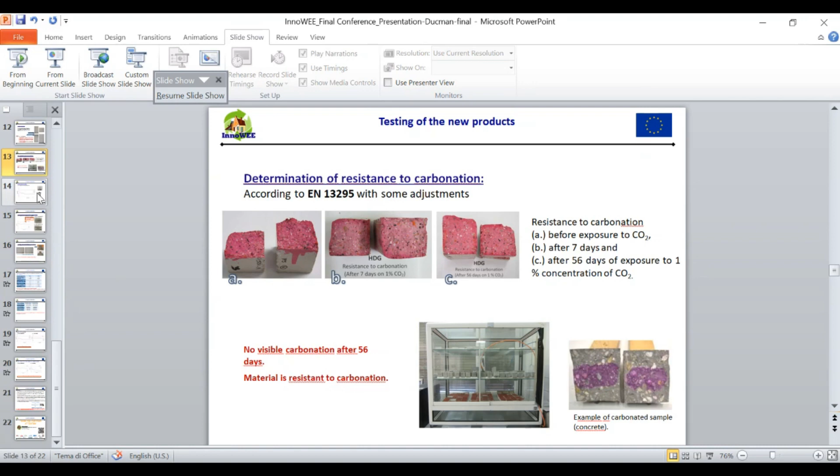The next parameter is alkali silica reactivity. This is also very important because such a reaction might take place under certain circumstances and cause expansion, and if it causes expansion, the material is deteriorated.

So we also tested our geopolymer panels regarding alkali silica reactivity. Samples have been exposed to high humidity and an elevated temperature of 38 degrees C for a whole year. It has been confirmed that there is practically no expansion; in fact, samples shrank a bit and stayed stable over 12 months. For cement-based material, this limit is 0.1%, but the alkali silica reactivity of our samples is far below these values.

The next parameter, also related to the chemical reactivity or chemical stability of the newly developed product, is resistance to sulfate environment. Exposure to sulfate environment in the case of cement can cause expansion and later on deterioration.

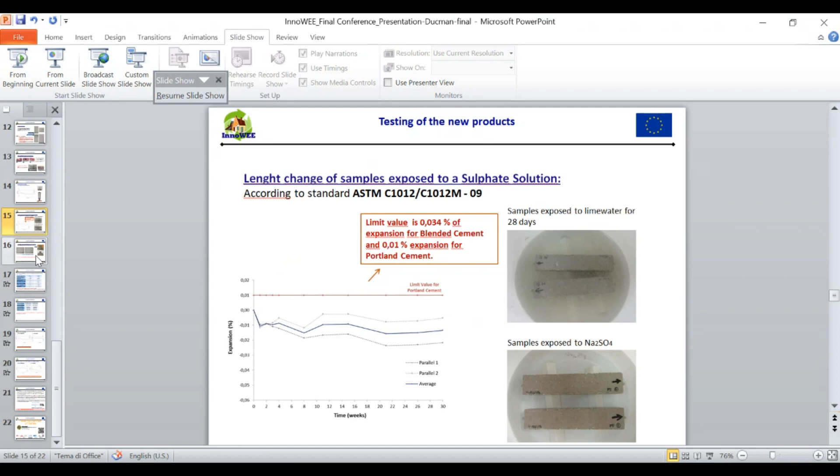In our case, we exposed samples to sodium sulfate and tested them for 30 weeks, and again, as you can see here, no expansion was detected. Here are given the limits for cement-based material, because for geopolymer-based material there is no limit set yet, so we need to stick to the cement-based limits and pay attention if anything happens in these systems.

In the case when such panels would be used in an environment with simultaneous action of salts and freezing, it's also recommended to do freezing tests in the presence of de-icing salt. This is not required by ETAG 004, but since we know this might be a problem, we introduced this method from the RILEM Technical Committee.

In our case, we exposed samples to 3% sodium chloride solution, but samples did not withstand these conditions because chipping and scaling of the material on the surface occurred, as you can see here. But I would say it's good to know this in advance, to avoid using such panels in, for example, marine environments, to prevent certain damages.

So I have shown results on samples developed in the laboratory, but the same methodology was used also for samples from pilot production. I will not repeat the whole procedure now; instead I will summarize results for the samples from laboratory production as well as from pilot production.

Looking at these values for mechanophysical properties, we can conclude there is very good correlation between pilot and lab production. Practically, the values are pretty much the same - for example, porosity, absorption, and density are very similar for lab and pilot production.

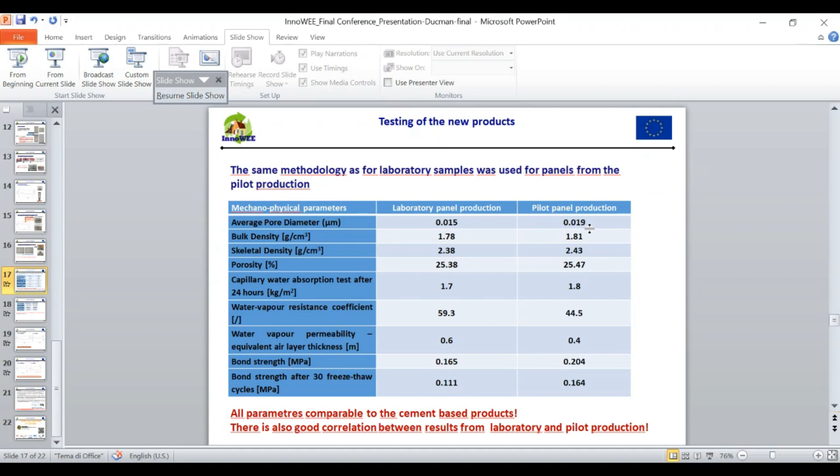The density is a bit higher for pilot production, and consequently some other values differ a bit, like water vapor permeability, bond strength, and water vapor resistance coefficient. But still we can conclude there is very good agreement between laboratory panel production and pilot production. We can also conclude that all the values are comparable to cement-based products, and if this were cement, it would fit for the intended use.

Additionally, durability tests have confirmed that the newly developed products are resistant to freezing, resistant to carbonation, resistant to alkali silica reaction, and also resistant to eventual sulfate attack. Products are not resistant if exposed to freezing in the presence of de-icing salt, both on the laboratory and pilot production, which means, as I said before, they have to be excluded from use in environments where salt and freezing act simultaneously.

Again, here is evidence that the results of tests from laboratory and pilot production are in very good agreement. We will also see this in the next two slides, where there is more detailed data presented graphically for alkali silica reactivity and for sulfate attack.

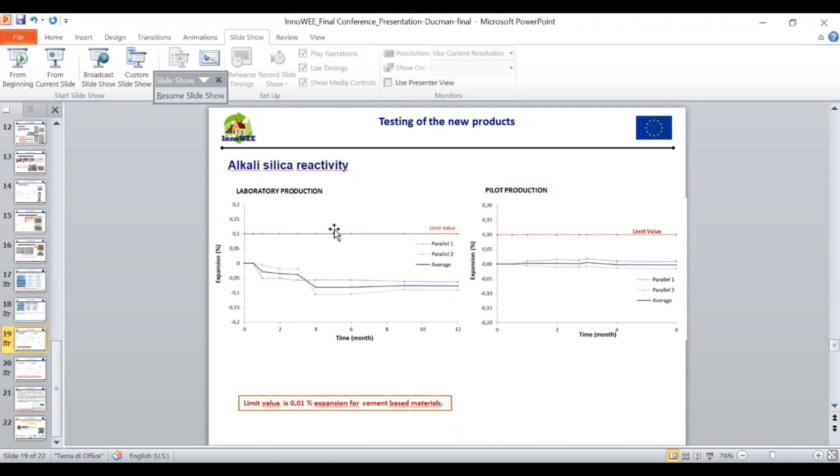We can see here the limit value set for cement-based materials, and we can compare results from the pilot production for six months and from the laboratory production for one year. For pilot, we only have 6 months because we received samples later, but still we can see the results are very similar, so there is good agreement between the laboratory and pilot production.

So if I jump to the conclusions, I would say that we have established the methodology for testing of newly developed building products, so that panels fulfill all the requirements which are set for cement-based materials. That material exhibited excellent durability performance except for resistance in the presence of de-icing salt, and there is a very good correlation between results from laboratory and from pilot production.

So, based on these test results, panels are suitable for intended use, except, as I said before, in areas where salt exposure could occur. And this is the first confirmation of fitness for use.

Next steps are results from monitoring on site in different climate conditions, which will be presented in the next section of our conference. I can conclude that if both testing from laboratory, from pilot, and also from on-site are positive, the future producer has a certain guarantee that products are suitable for intended use. After they set up the pilot production line, they can apply for the European Technical Assessment, which is the document with which they will be able to come onto the market.